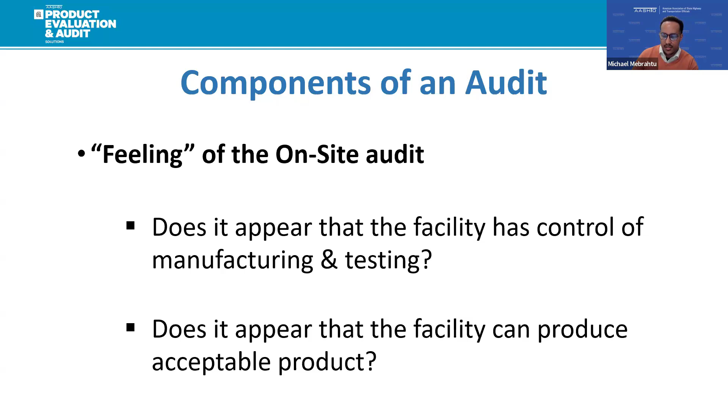Also, does it appear that the facility can produce an acceptable product? Yes, we review the quality of products being produced as well. Indicators of this include compliance with relevant standards and specifications, completion of quality control tests, positive comparison sample results, and minimal issues in the final products. A facility that consistently meets or exceeds these standards and customer expectations is considered reliable.

So this is the end in terms of the components of an audit.

One of the things we do for the documentation of our manufacturers is review the specifications. Basically, when I've visited a couple facilities, I would see the auditor bring out these checklists, and what they're doing is checking to see if they have every specification up to date in their documents and files. They need to ensure that they adhere to the relevant standards and specifications for the program, including AASHTO and ASTM standards and documentation compliance.

Training competency, as I mentioned before—we verify that employees involved in quality control and testing are trained properly and are competent. This involves reviewing training records and evaluations.

For calibrations, verifications, and standardizations, this is just to make sure equipment used in manufacturing and testing is properly calibrated and verified. For testing, this is basically reviewing the current and previous test results to ensure product quality and compliance. This involves examining recent test records and historical data for comparison, and documentation of corrective action.

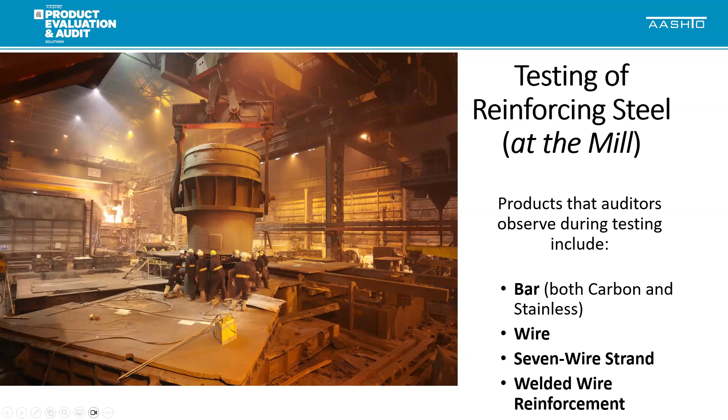In the testing of reinforcing steel at the mill, anybody familiar with testing done in their own laboratory at the DOT can see we're looking at all the tests basically associated with the product and what the specification calls for. So we're looking at tensile strength, yield strength, elongation, bend, and modulus if you're looking at strand. Of course, weight per foot if you're looking at deformed material, and along with that, also deformations for deformed material, and diameter for plain material.

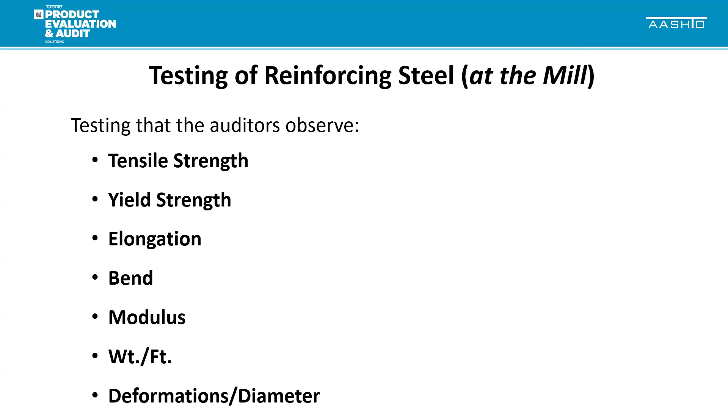Now, if you haven't been to a lab, I would highly encourage you to go to your own lab if you're doing reinforcing steel testing and watch what they do, because it's always interesting and you learn a lot.

We are at the manufacturer here, looking at the tensile strength of the bar, or the same test would look similar if we were using it for a piece of wire. So we use the tensile test to get an idea of the overall strength of the product, even though from a design standpoint you're more interested in the yield. But there's a certain requirement for the product as to what is the minimum tensile strength, and in some cases the maximum tensile strength. We do that for both plain, or smooth, and deformed bar and wire.

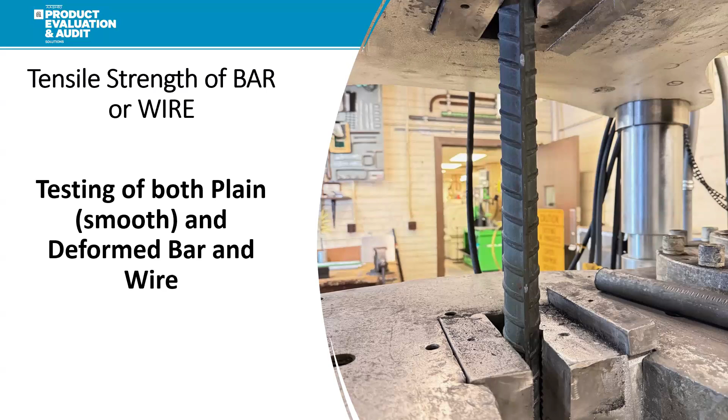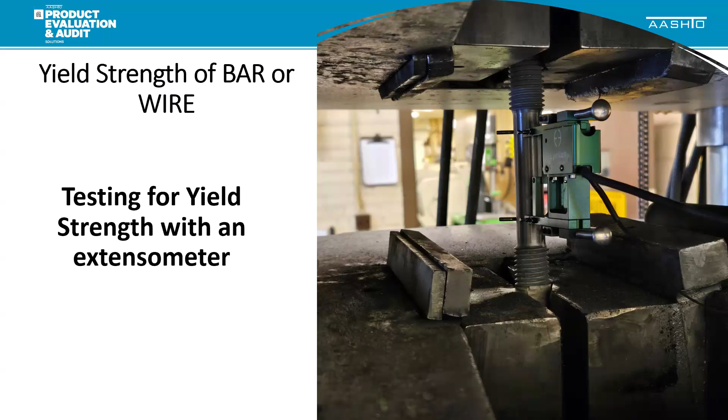Other testing we witness is the yield strength. Like I said, from a design standpoint, the yield strength is very important. This is an example of a yield test going on. It's done as part of the tensile strength test, and as you can see, the green item attached to the bar is an extensometer. What that does is help determine the yield of the product as it stretches under load. This is an example of what it typically looks like, whether you have a bar or a wire in the unit.

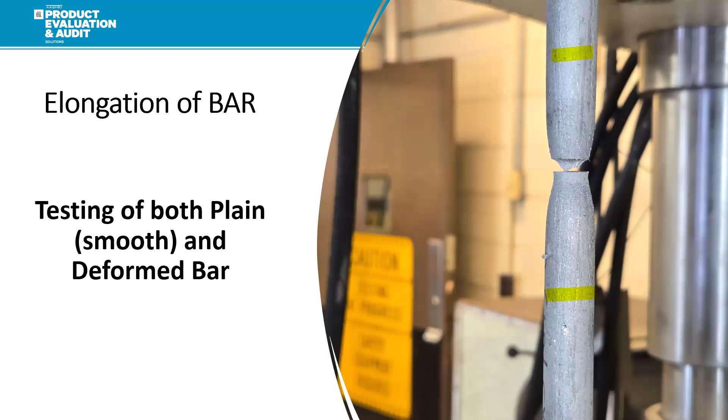For elongation, a bar is marked when it's together, and then it's tested until it fails or breaks, as you can see here. It's measured again afterwards, which gives you how much ductility or elongation that bar had before it fractured, so you're getting a total elongation that goes on. Once again, you can do this with both plain and deformed bar. This is an example of plain bar that I have pictured here.

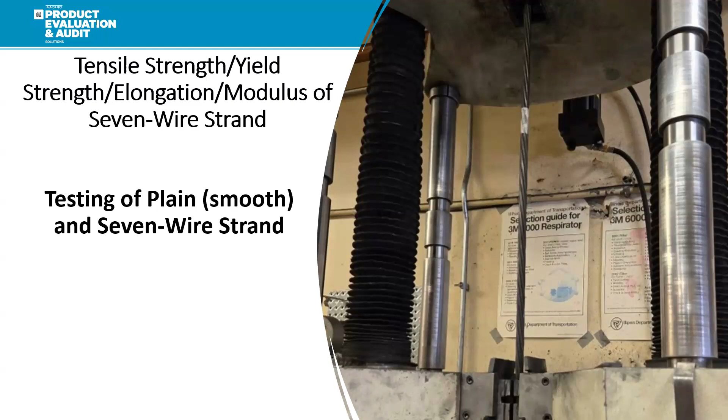With strand, you're looking at several things: tensile strength again, yield strength, elongation, but also the modulus of elasticity, which is an important design factor. So once again, we're looking at this, and this is a picture of the strand under load, and then the next picture shows what it looks like after it fails. You'll get one wire break, and then a couple more, because even though it's a 7-wire strand, if one breaks, a lot of times the strand itself can still maintain and hold up until a few more of the wires break. That's what you're looking for, when things happen and what comes of all of that.

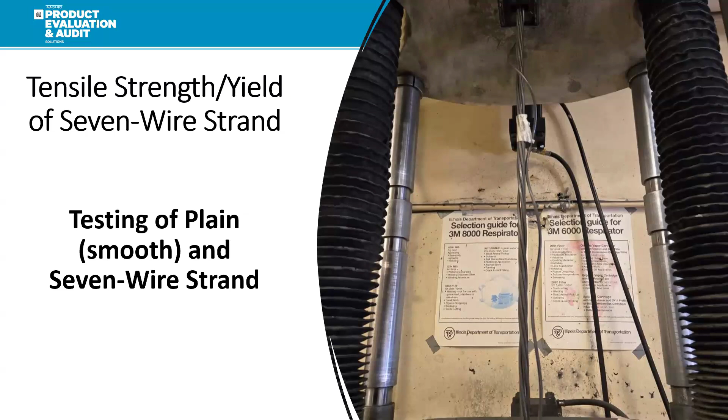Other products that we look at are welded wire reinforcement. We talked earlier about wire, which is kind of like bar, it's a straight piece of steel. Now you take that straight piece of steel on spools, and you go ahead and weld it together, and you end up with welded wire reinforcement, which is starting to be used more and more now in lieu of just conventional tied reinforcing steel.

And we go look at the welded wire mats, and we sample that. We're looking at both plain and deformed wire, and we take samples of that and run them through a series of testing.

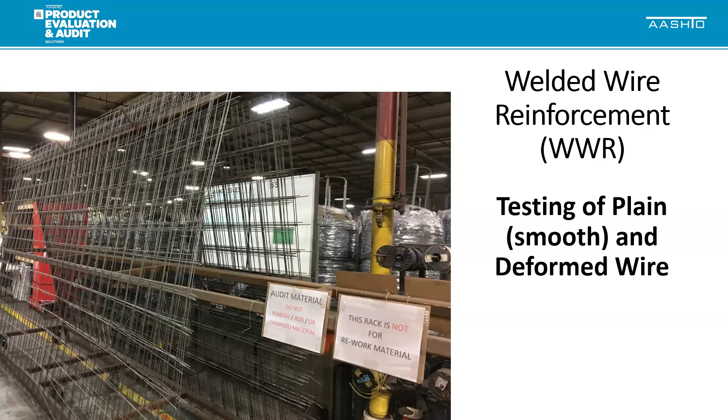Example of one of the tests you do is you take an intersection. The finished sample kind of looks like a cross. If you take a look at the drawing, at the very bottom, you're pulling down on the wire, and you have the cross nestled in the weld shear rig, as it's called, or testing device. You're pulling, and you're looking for that cross wire to basically shear away from the longitudinal wire that you're pulling on. And that gives you an idea of what your weld shear strength is.

And once again, we witnessed that for both plain and smooth, and then also the deformed wire.

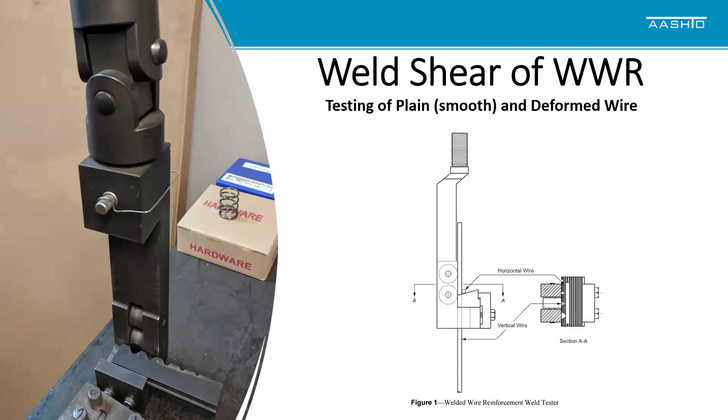And then with steel, you have to do a bend test. That gives you another idea of ductility and the ability to go ahead and fabricate the steel.

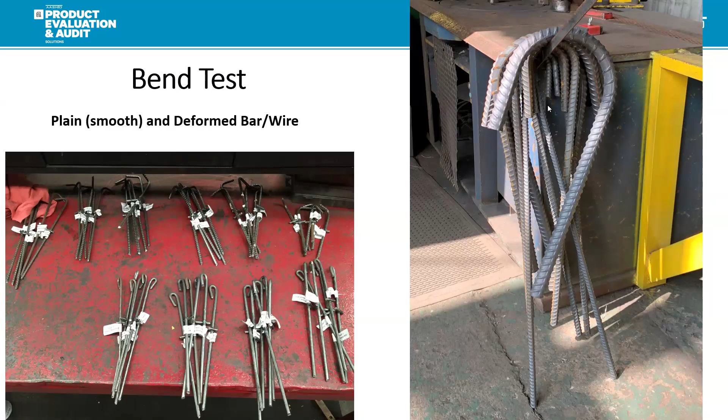And as you can see on the left-hand side, there's a similar test done on wire, because once again, you're trying to make sure that any fabrication, anything that goes on with that wire can happen, and it could be bent at the appropriate diameter.

And really what it comes down to when you're an auditor and you're in testing is, you got to have some fun on these audits. If you have never been on an audit, I would highly encourage you to go ahead and attend the audit and see what goes on. And what I'd like to do is, here's something I'd like to leave you with for my portion, something that we kind of get some enjoyment out of - we get to watch stuff break.

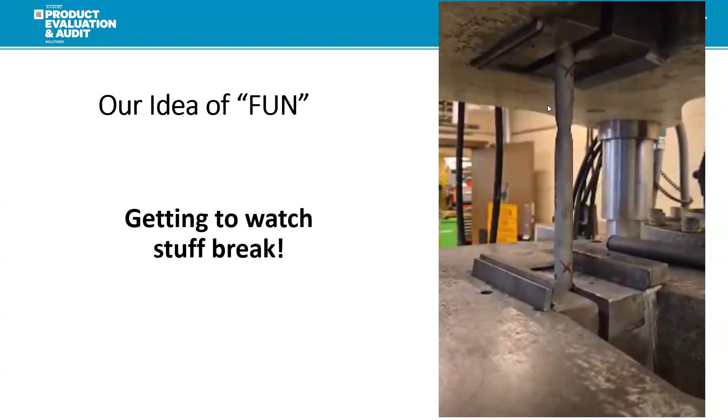All right, thank you very much, SARS. That was a great part of seeing how audits work in the reinforced steel and wire.

Now, once an auditor has completed their audit, and afterwards they go home or go to their hotel, they actually upload documents regarding the final audit report, or comparison test results, and various other documents into DataMine, which is our repository of all audit data, which you will have access to - or you should have access, but if you don't, let us know.

Let's say if you wanted to see a facility in Jacksonville, Florida - and I keep saying Jacksonville, Florida, because I just visited there, I love it there, very sunny. You would click the manufacturer, then click Jacksonville, Florida, and then, of course, the product type or product specification - whether it's welded wire or rebar or whatnot.

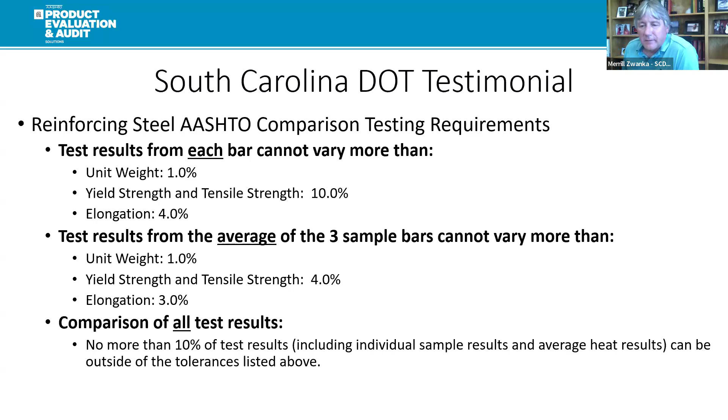You can go on DataMine and look at the comparison tests between the AASHTO designated laboratory and the facility, and then your state may want to have tighter tolerances than what's out there. So I encourage you to take a look at that if you haven't.

And then how this helped us is we were able to reduce our project level field sampling quantities for rebar. For producers in this program, we used to go visit these facilities, and then also out in the field, we took samples from the project sites under bridge projects and things like that. I used to have to get a sample each size, each shipment, got a lot of them each month, and now we've narrowed it down to where you only need to get that once a month.

We felt like this program showed that the facilities, even in between times when we're not sampling on the project site, the producers were producing a very high quality product. We had very, very few failures in material. We feel pretty good about this program.

Our DOT has been very fortunate. We had a state gas tax increase for the first time in like 25 years. Really tough, but that extra money, we were able to get all kinds of construction projects out there while also cutting staff. So this was one way we were able to accommodate that extra construction work. We could reduce some of the rebar sampling, rebar testing, and therefore keep up with the projects that are out there. So I highly encourage you, even if you don't do audits right now, this is a good program to use. You're paying for it anyway, go ahead and put it out there as a requirement. It's not going to hurt you.

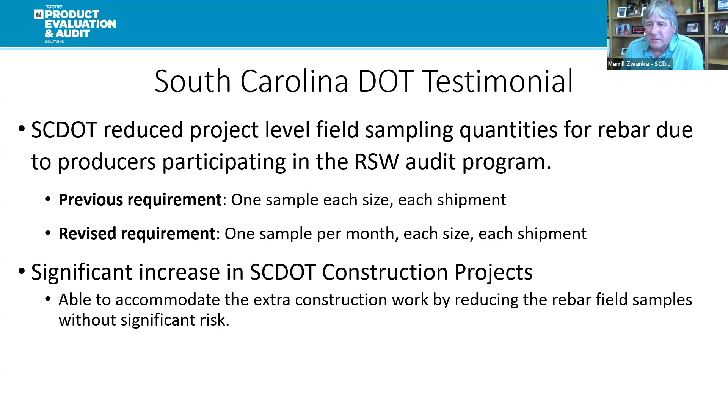And with that, I'll introduce the vice chair of this program, Kenny Seward of Oklahoma DOT. Hi, I'm Kenny Seward with Oklahoma.

Oklahoma's been involved with this almost since the inception. As soon as one of the facilities in our state was up for audit, we started assisting Robert Sarcinello and Catherine when they would come out as auditors and inspect the mills. We use it for compliance for reinforcing steel and bar. We require our bar to meet AASHTO M31 or M322. We use S and W both where allowed. We use mostly S, we don't do a lot of seismic in Oklahoma. The only way for a reinforcing steel bar mill to get on our approved list is to have this program and be compliant. We started out, we just used it as a place to determine how everything was going.

But once Texas came on board, and they're the big dog in our area, we just jumped on and said you have to be compliant. There's no other way to get on than to be compliant.

Wire, we use that to put anybody new on. We've still got some facilities that we had on before compliance came out. We haven't cut the cord on that and said everybody on the list has to be, but we will be doing that also soon. We don't currently use it as the only means to get on 7-wire strand and pre-stress and everything, but we are looking to do that. The reason we don't is we don't maintain a list of approved facilities yet for 7-wire strand. So once we determine that we want to start a list of approved strand facilities, we will go to where they have to be compliant. We think it is important that they be audited.